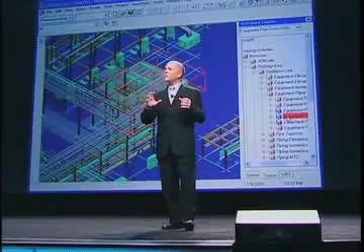What happens within Smart 3D, because it's a data-centric 3D modeling system, is you've got very rich amounts of data, and so the drawing extraction process is a little bit different. What a user does is simply identify volumes of the plant for whatever reason, whether they want unit isolation, area isolation, or elevation isolations. They just identify the different areas or categories or boxes, if you will, and name the type of drawing they want out of each box. Those boxes could be overlapping or not.

The Smart 3D drawing extraction engine will then not only extract drawings and do a lot of the annotation and labeling, but it also maintains version control. You can see green check boxes there, so it lets people know if the drawings that have been extracted are currently synchronized with the model, or if there's been a change in the model that needs to be looked at before those drawings are used.

Now, once those are extracted, we're using technology such as the eDraw technology I mentioned to do automated labeling, annotation, and dimensioning. I think you guys are familiar with Isogen, which is near 99-point-something percent automation and complete. The Smart 3D drawings engine now is the same for many of the ortho and plan drawings, so they're near 90 or 95 percent complete without any touch-up. And that's a valuable piece of productivity for you.

And as we talked about before, it also has a quality and safety impact. By doing this kind of system, we've reduced the risk that out-of-date drawings get out uncontrolled into the field for construction. Now designers have very good control over the versions of the drawing, and they can see that even though they've got a high degree of automation.

One of the things that we've done in the drawings area is to provide a lot of content and a rules engine that allows you to customize it to exactly what you need to produce the outputs that you need for your deliverables.

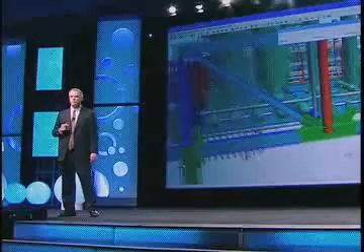This model is an FPSO from Petrobras, and they gave us the rights to actually deliver this example with our applications, which is kind of cool.

Here we're flying through the model. We're able to focus in on a particular component, and just by clicking down and holding on the mouse, you can orbit easily and rotate around the component you're interested in. You can hit the home button and go directly out to a default location.

One thing we've done to make it much easier and more efficient is provide a slider where you can change and focus between quality and speed. If you're on a high performance machine, you can crank it all the way over to quality and fly through in real time in this very beautiful rendered environment. But if you put it in fast mode, you can do it on a little laptop with a very large model and still fly through in interactive mode.

What you're seeing here is also a capability we've provided to clip down the portion of the model you're looking at. In a very efficient and easy way, you can clip out to just the portion you care about, and extend that back out to focus in and see exactly what you'd like. You can navigate around in that.

You can go to the non-graphic information that's either in Smart Plant Review or in Smart Plant Foundation. This brings all this information together for you to do design reviews, design checks, and engineering checks in a 3D, visually appealing environment for you and your customer. We're really pleased and excited with what we've provided here.

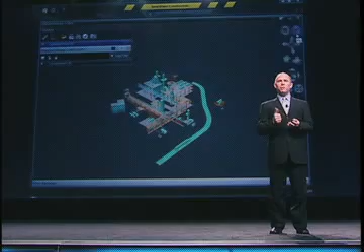Smart Plant Construction allows a construction planner to use a 3D visual perspective of the plant to begin putting together the detailed team work packages that you would give to a field foreman to execute along with a team of technical specialists. They're using updated information that's integrated either with PDS or with Smart Plant 3D, and with Smart Plant Materials and with basic drawings that can be imported from anywhere, and with Primavera.

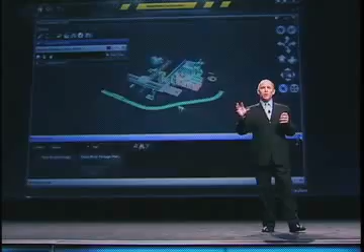So we've really started to create a central intelligence for construction planning and also dynamic replanning. With a system like this, it becomes very simple and straightforward when things happen on projects, which they always do, to begin changing plans, moving the timing around on specific work packages, or creating new or different work packages based on changes in materials availability.

As you can see here, the 3D view control that Charles was showing has already been integrated with Smart Plant Construction with the exact same user experience, so that it begins to look common across your organization and people start to feel more familiar with these tools and less alienated, because we thought that construction planners in particular would feel alienated by some older CAD look and feel technology. So we made a lot of effort to improve that.

Now, one of the things that's also happening on the research side that impacts Smart Plant Construction is Charles is doing a lot of research in mobile devices, because we know that mobile devices are important not only for construction but also for many other design and operations and maintenance activities that are happening.

In the last quarter alone, over 65 million of these smart devices have been sold. That's 50% higher than it was last year at this time in that same 3-month period. So we're looking at this trend to see how we can leverage this and how we can make our tools and our data available for you anywhere, anytime that you need it.

We've looked at how we can do this by making our web portals more portable. It's not intuitively obvious that a mouse quickly becomes a finger, that's a little bit bigger for those in the user experience world. So we've had to tune our user interface and our web portals so that they would work in that environment. It's really pretty exciting to know that you can take this data with you wherever you need to go.

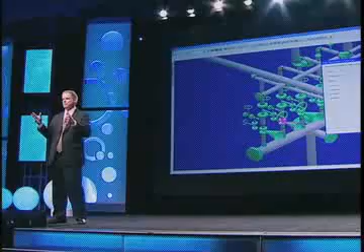Thank you. So what Grenland Group has done is allow the user to go in and select an area of the piping systems or other equipment and different things they'd like to track. Once you have that information, because of the data inside the system, we keep track of when an object was created, when that component was added to the system, or when it was modified. That rich information in the database can be used to keep track of progress in a much more efficient way than we've always done in the past by counting drawings and ISOs and others.

They've taken that information and combined it with information from SmartPlant P&ID, where they have the totals of all the components that need to be put in the system. That allows them to do an S-curve and keep track of progress throughout the whole cycle. We think this was just a really unique way to use the automation capabilities, the data-centric environment, and the rules of Smart 3D to be much more efficient and keep track of their projects so they could deliver them on time and under budget. We really do appreciate the work that Darren has done on this.